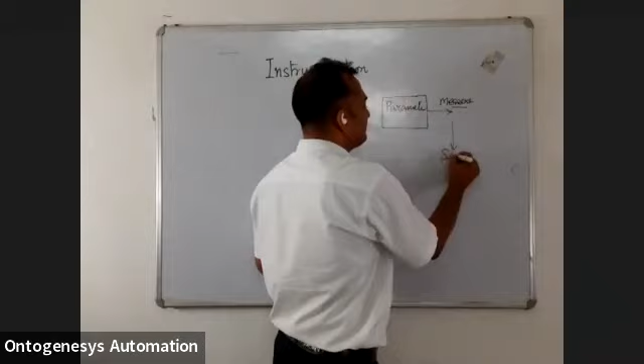To measure anything, what we need? We have to sense it. If we can sense any parameter, then we can measure that parameter. So we need some sensors. So if we can sense anything, we can measure it, and if we can measure it, we can control it.

Now, to control, we need what? We need a controller, some kind of controller. That controller might be electrical type, electronic type. Basically, we are going to study programmable logic controller and DCS system. PLC, or the complete system, distributed control system. We will study this.

Now, when I talk about PLC and DCS, the confusion that comes in our mind is what is PLC, what is DCS? Whether they are completely different things. But basically, this is a control and this is a control. Whenever we are talking about some small number of IOs, then it is our PLC. Suppose I am talking about some machine control, then it will be PLC.

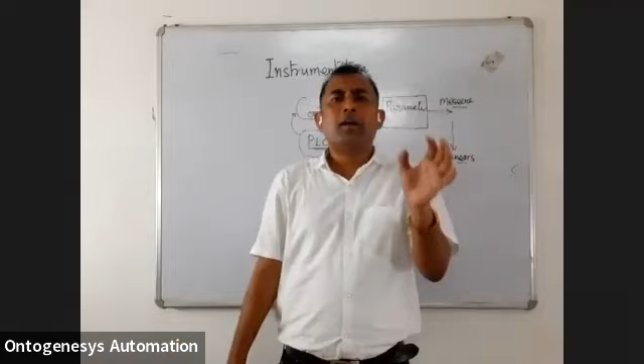Suppose you are having a packaging machine. Suppose I want to make some packets of turmeric powder or chips. So I need a simple machine for packing. Then PLC will be better. I will hardly need 8 to 10 inputs, and there will be some 4 or 5 outputs. So when I am talking about a few inputs and outputs, it is our PLC that can solve our requirement.

And when we need to handle a large number of IOs and interlink everything, like in power plants or refineries, there are so many divisions and all are interlinked to each other, then it is better to go for a DCS, distributed control system. We can also say that a distributed control system is a combination of multiple PLCs. You can have many PLCs, interlink them, take everything to a single station and give it to operators. So this is the basic difference.

Whenever I say PLC, it is small to large. A PLC can be as small as 2 inputs, 1 output, or something like this. But a DCS must have a certain number of inputs. Otherwise, it will not be of use. It will not be cost effective.

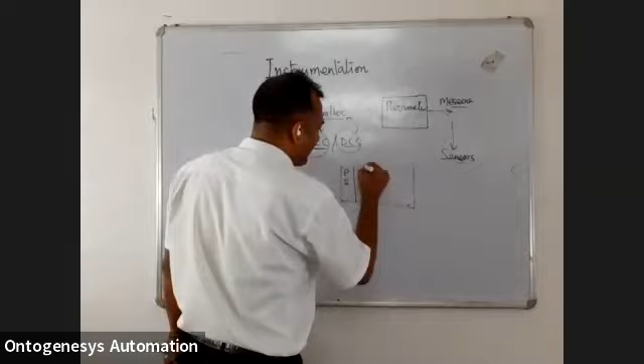Now to process everything, we need a controller, a brain, and that we call CPU, central processing unit. Just like our computer, we are having a CPU, but the design is different from the normal CPU. Unlike our normal computer, we are having some input/output cards or channels. This we do not see in our computer.

Yes, we are having some input and output in our computer also. What is the output in our computer? We can connect our printer. What are the inputs? We can connect keyboard, mouse, scanners, etc. But we can handle other physical devices also through this computer, but we need some external peripheral devices and programming. Those things are included in this.

This is an industrial computer, and we have an easy method to connect with the real-time environment, real-time devices. So we will be having digital input, digital output, analog input, analog output. So these four kinds of signals we will have in our field, and four types of cards will be attached to our PLC.

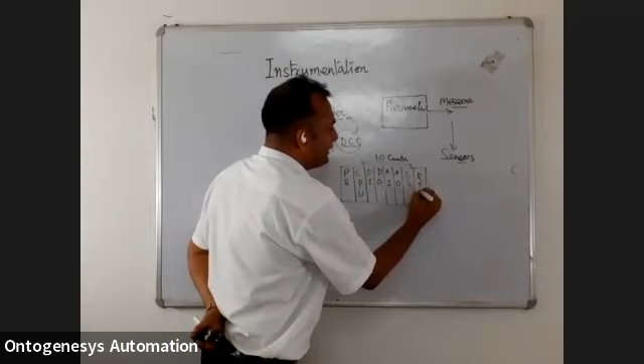Other than these four cards, we might have some cards for thermocouple and RTD. What is a thermocouple? A temperature measuring element. On which principle does a thermocouple work? If we have two dissimilar metals connected at one junction and there is a temperature difference or temperature gradient, then we are creating what? Voltage. Okay. So we will have some EMF or voltage here.

Can you tell me the range of this voltage? Will it be in volts or kilovolts or something? It will be millivolts. Suppose a thermocouple. So I am having this. Can you tell me what these are? These are temperature elements, temperature measuring devices, because they have a stem and some terminals. Can you please tell me which one is thermocouple, which one is RTD?

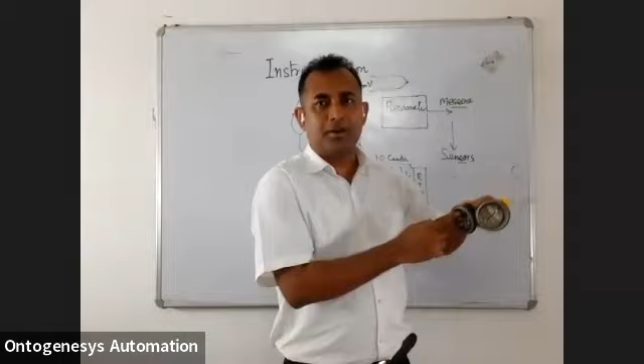So how to distinguish between the thermocouple and the RTD? We have to look at the terminals. And RTD has how many terminals? RTD has three terminals. Normally, we use three-wire RTDs. Okay, and thermocouple two-wire. So a thermocouple will be two-wire, and the RTD will be three-wire. This is the symbol of the RTD, and this is your thermocouple.

Now, what have you seen here? Terminals. In the black one there are six terminals, and in the yellow one there are four terminals. Then it is called a duplex thermocouple and duplex RTD. Means there are two RTDs and two thermocouples inside this case.

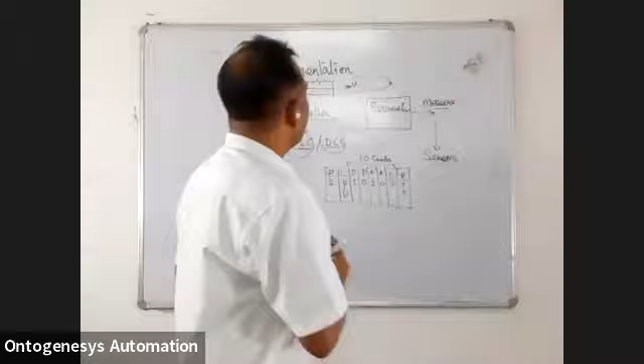Another way to identify the thermocouple and RTD is that in our thermocouple there will be plus and minus. Since we are getting millivolts, DC millivolts, there will be plus and minus signs. But in RTD, it is a single wire. Which material do we use in RTD? Platinum. Normally in our industry we use platinum 100, PT100, in our RTD.

And what type of thermocouple do we use? We use K type thermocouple. When I say K type thermocouple, the two materials selected are chromium nickel and aluminum nickel. What will be the range? The range will be up to 1200 degrees, 0 to 1200 degrees centigrade.

Normally this much temperature is sufficient for a furnace or in power plants or in big industry. This much range is okay. If you have some higher temperature, say 1500, 1800, then it will be different, right? But normally we use this.

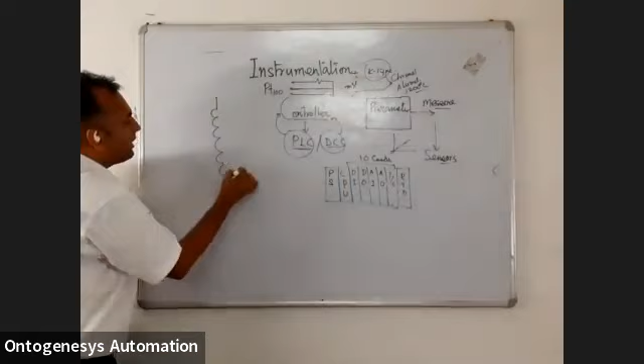What is the symbol? We show one resistance in the path of the RTD, and two common. This symbol means two lines are common. What is RTD? It is nothing but a wire. How is it working? What is the working principle? With temperature, the resistance of pure metal varies directly.

That means what type of material are we using here? We are using positive temperature coefficient metal. There are three types of temperature coefficient: PTC, positive temperature coefficient; NTC, negative temperature coefficient; and ZTC, zero temperature coefficient. So we are using PTC materials, means pure metal. Pure metals and some metal alloys are positive temperature coefficient materials. That means with increasing temperature, the resistance of the material increases.

If the resistance decreases, there will be negative temperature coefficient. Likewise, what are the NTC materials? Likewise, all non-metals, insulators, electrolytes, your semiconductor devices. Why are they negative temperature coefficient? In case of a semiconductor, if you put it at absolute zero temperature, it will behave like an insulator.

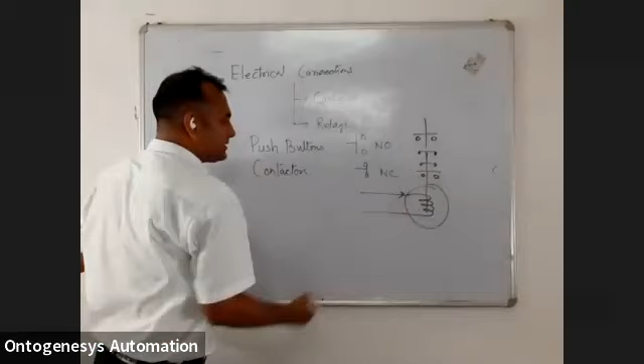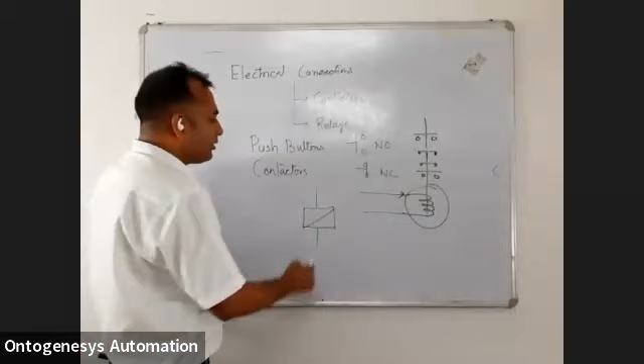So what is the circuit symbol? The circuit symbol for this coil is electric current - this is the coil of the contactor. And name it as A1, A2. The two terminals are named A1 and A2. So whenever there is a coil, whether it's a relay, a timer, or a contactor, we will name the terminals A1 and A2. Let's see here - A1, the other one.

This is like the A1 terminal. So we will be giving supply here. How much supply will we give? It will depend on the coil of the contactor.

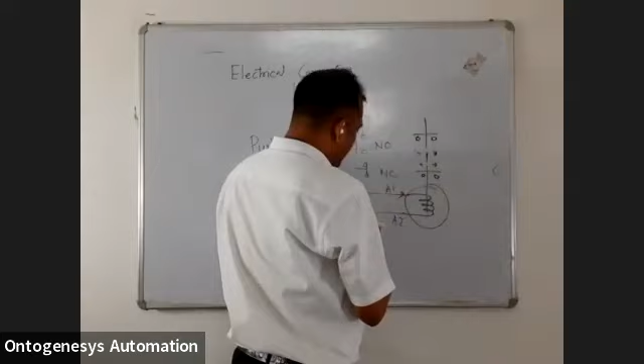L1, L2, L3. You might be thinking why L1 and these certain areas are marked like this. This is the standard nomenclature.

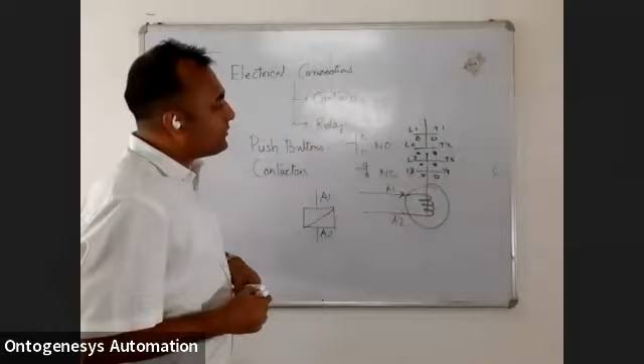The first digit represents the contact number, of the four contacts, and this is actually your starter circuit. So L1, L2, L3 are the three terminals, and this number shows the position of the contacts: 1, 2, 3. The second digit represents something else.

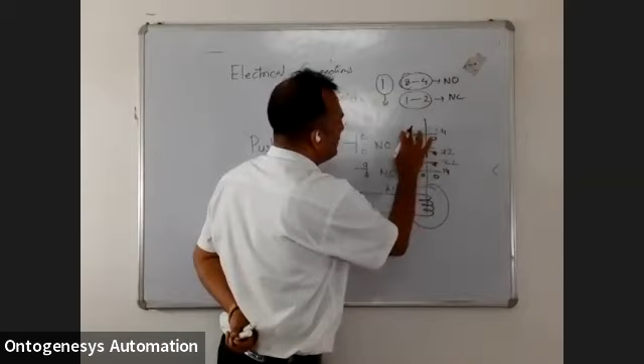LC 1, 2 - that is the number, the position of the number. Likewise this is 1, 2, 3. So I have 4 contacts, 1, 2, 3. The second digit represents whether this contact is NO or NC. So this is 3, 4. Likewise when you see the terminals you will find these kinds of numbers.

So the coil is represented by A1 and A2 terminals, and contacts are as 13, 14.

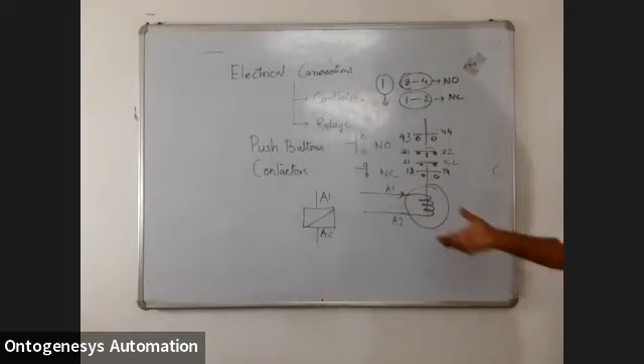Now to control electrical energy, control is separate. We will control this supply and this object.

So straight away I'm coming to our model. What kind of motor are we using in this? What kind of motor? Induction.

There are two types of induction motors. What are they? Either it is a slip ring induction motor, or a squirrel cage induction motor. So we will be using squirrel cage induction. This is how the induction motor works.

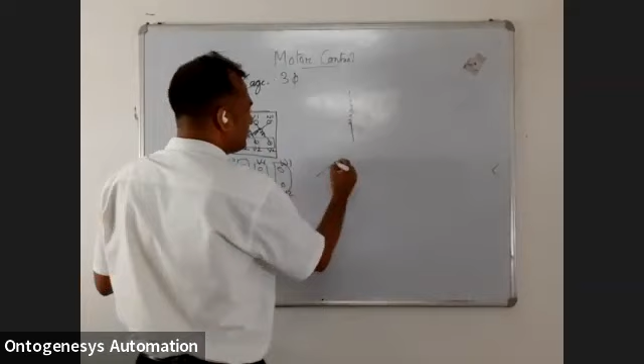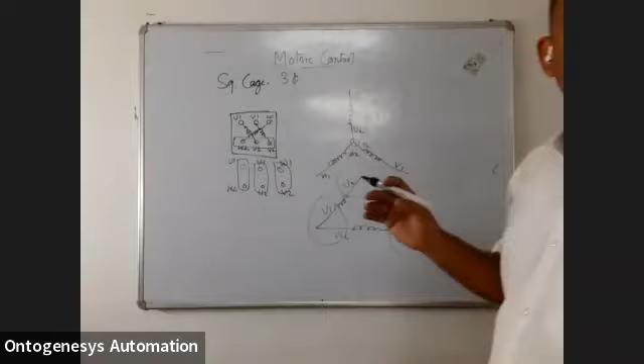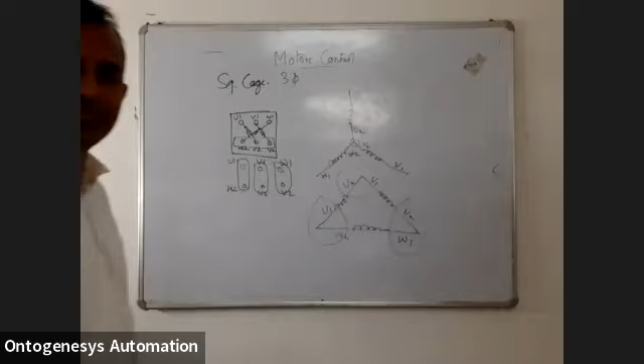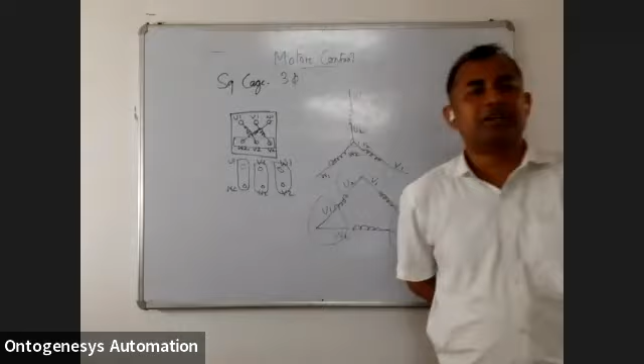When a balanced three-phase winding, displaced in space by 120 degrees, is supplied from a balanced three-phase current displaced in time by 120 degrees, then a rotating magnetic field is produced, which rotates in space at synchronous speed. And the direction of rotation is the same as the phase sequence of the supply.

When a balanced three-phase winding is displaced in space by 120 degrees, here are my balanced three-phase windings displaced in space by 120 degrees, supplied from a balanced three-phase current displaced in time by 120 degrees. So current is displaced in time by 120 degrees, and the coil is displaced in space by 120 degrees. When they meet, the rotating magnetic field is produced, and its speed is the same as the synchronous speed, and the direction of rotation is the same as the phase sequence of the supply. That means if I interchange the phase sequence, the rotation of the induction motor will be opposite.

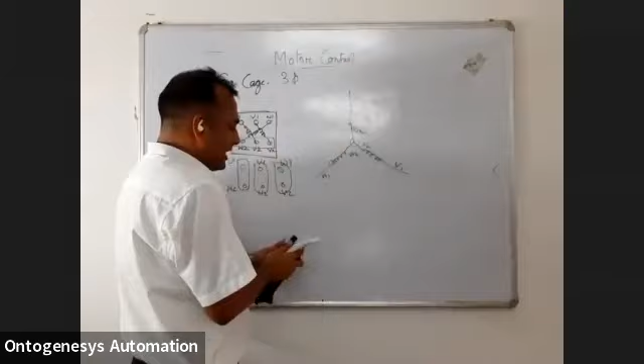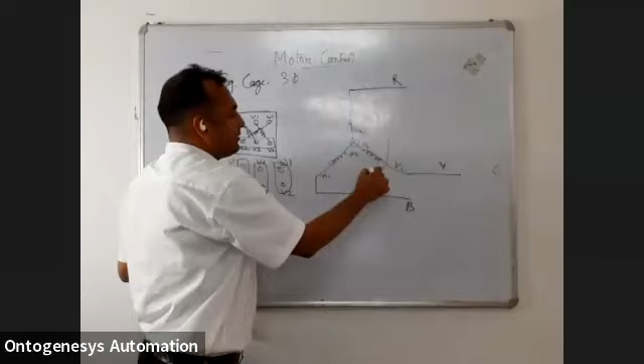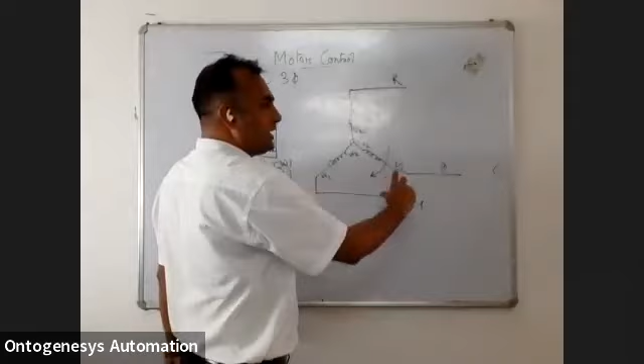Suppose I am connecting this motor. As the machine is rotating, I can change the rotation of the machine by interchanging any two phases. I just interchange two phases, and the rotation of the motor will reverse. So we can just interchange the two phases, and the rotation will change here.

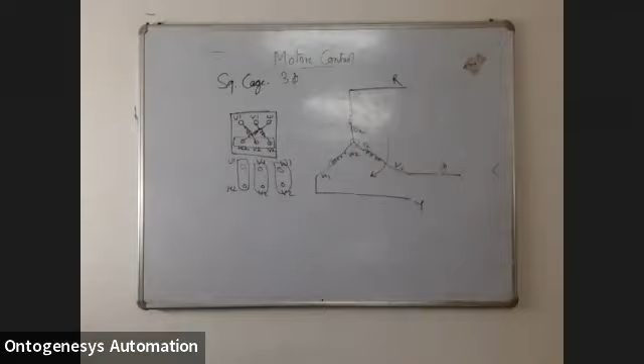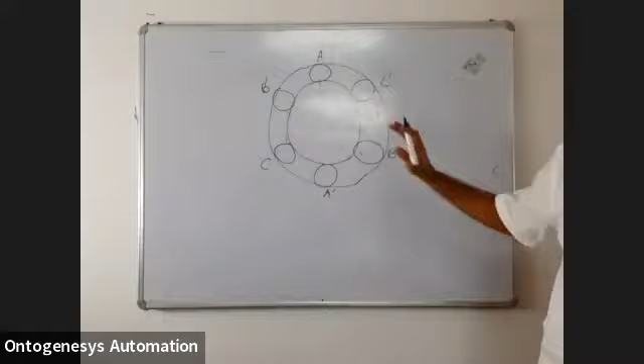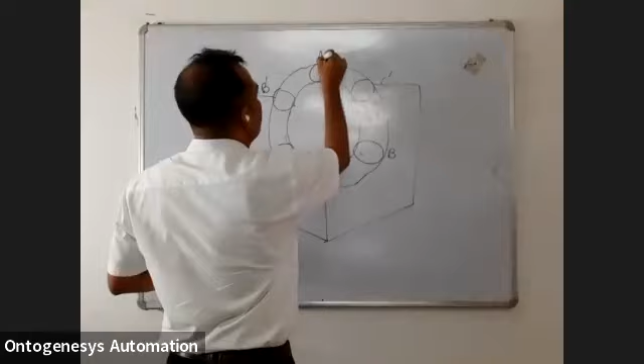Now what I will do is short this B dash - three terminals I will short, so it is a star connection. Now I am feeding it with three-phase balanced supply - this is one phase, this is second phase, third phase.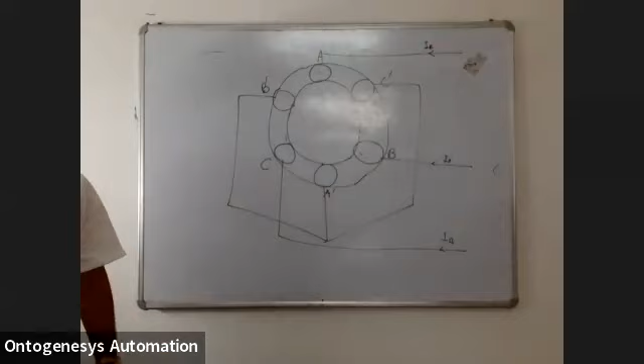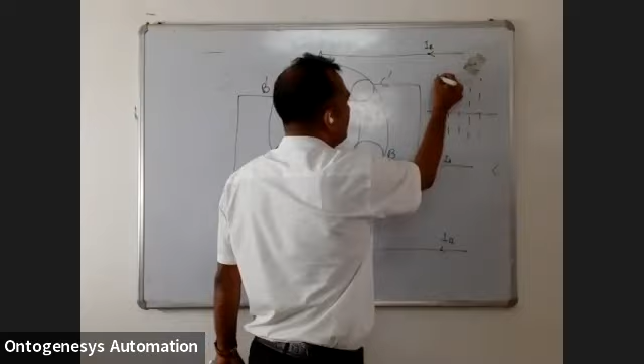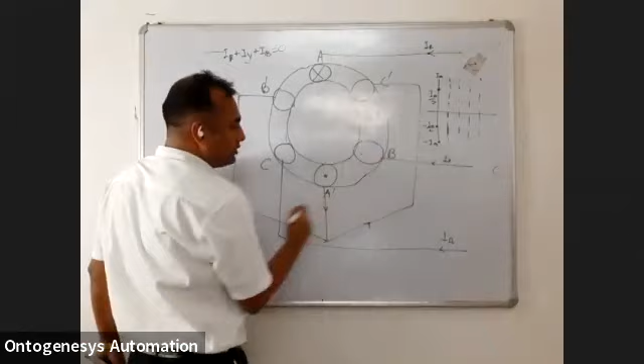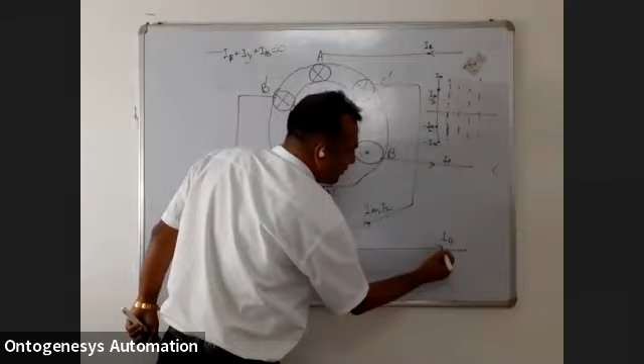Now, if you understand the three-phase supply, suppose this R phase is having the maximum current. At that time, the other two will be having minus IM by 2, because IR plus IY plus IB balance to zero. So when my IR is maximum, IM is coming in, out, and then going into the windings. The two windings have a balanced circuit, so having the same impedance, this will be IM by 2, moving from the terminal in this direction. So when my IR is maximum, IY is lagging at minus IM by 2, and IB is also minus IM by 2.

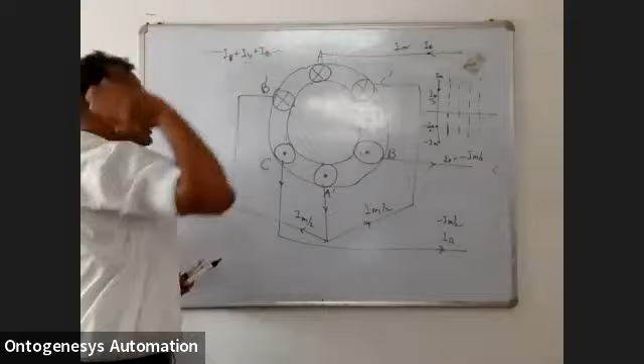Now what have we done? We have created a three-phase winding, placed 120 degrees apart in space, and we have supplied this three-phase winding with a balanced three-phase supply. The current is displaced in time by 120 degrees. First IR will be maximum, after that IY will be maximum, after some time IB will be maximum. So this three-phase supply is balanced.

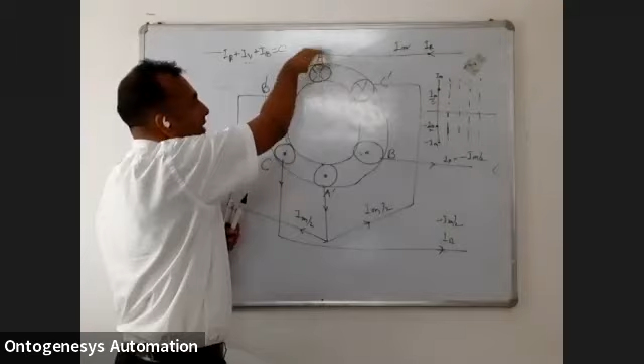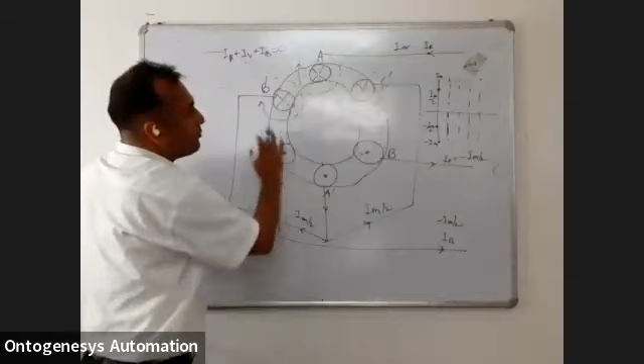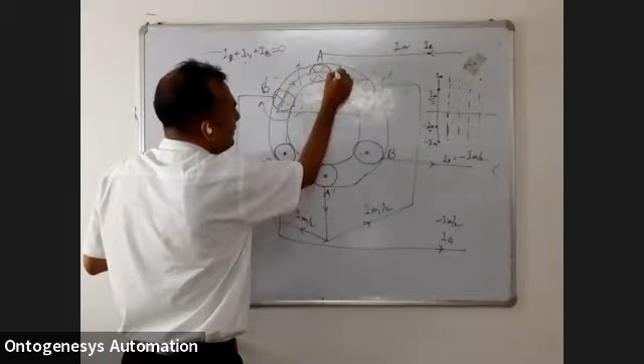Okay, now we can see - if this current is going in, what will be the magnetic field? The direction of the magnetic field will be clockwise. Since it is an iron body, all the magnetic field will choose the path through this stator and come out, cutting the rotor. Similarly, you can see here the flux is in this direction, the flux is in this direction.

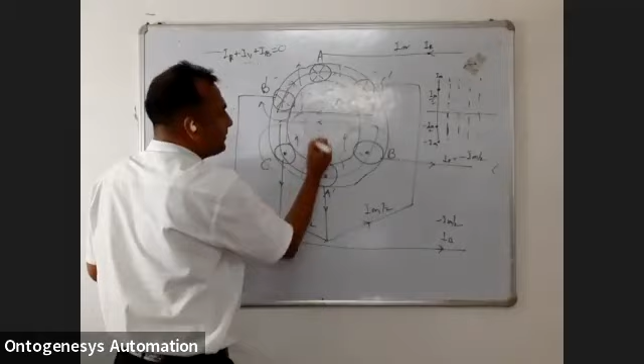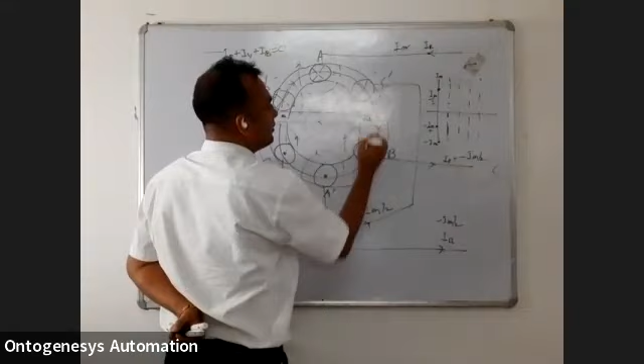So ultimately, okay. Now you can see in the stator, the flux is entering at this point and leaving from this point. Isn't it? So the part of the iron from where the magnetic lines of force or magnetic flux are coming out is called the North Pole. So here the flux is coming to here. So this is North Pole and this will be South Pole.

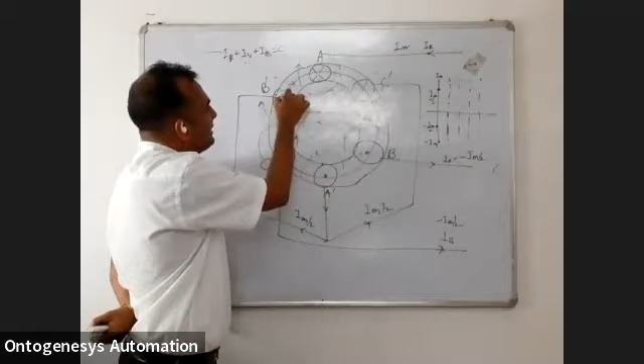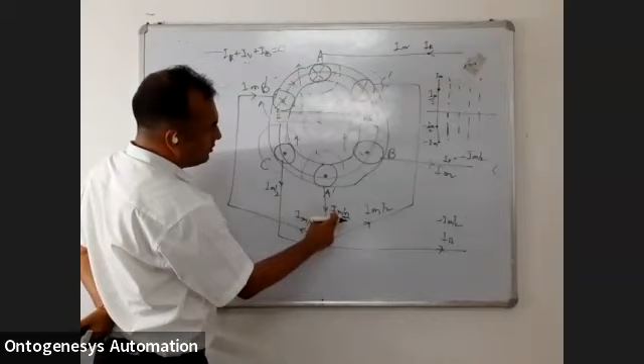After some time, this should be maximum when the current is in, maximum current is in. Suppose it is rotating, so current is in and maximum current is here. This is giving IM. So if this is IM, this will be IM by 2, and this will also be IM by 2. If this is coming, this is also coming to them. IM by 2 plus IM by 2.

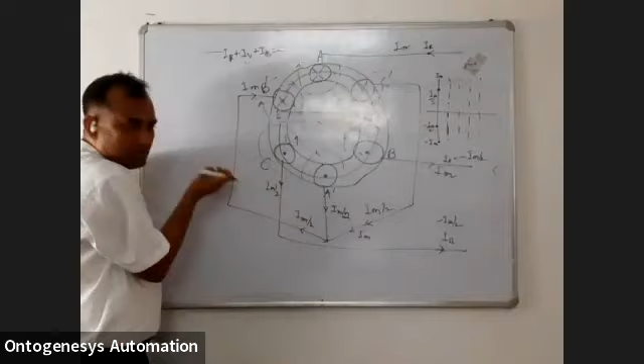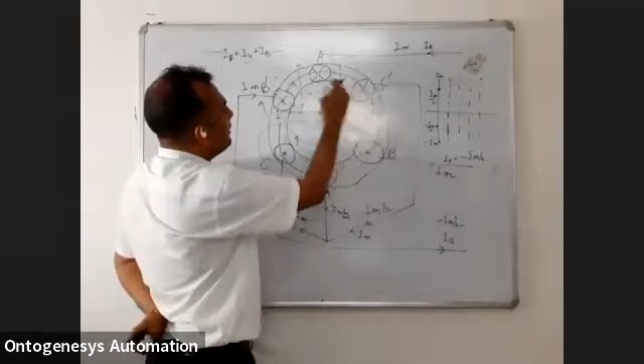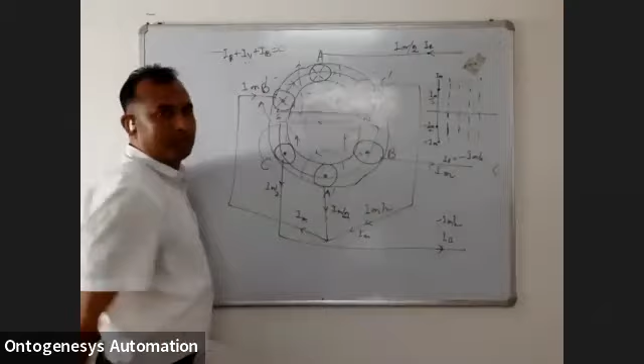Now you see, the current is leaving from A. Current is leaving from B, from B dash, from C dash. Are you getting the point? This is IM by 2, this is IM by 2, and this will be IM. So if it is IM by 2, the current here will be IM by 2, and it is coming out. The direction will be opposite. So IM by 2 current is coming here. Got it?

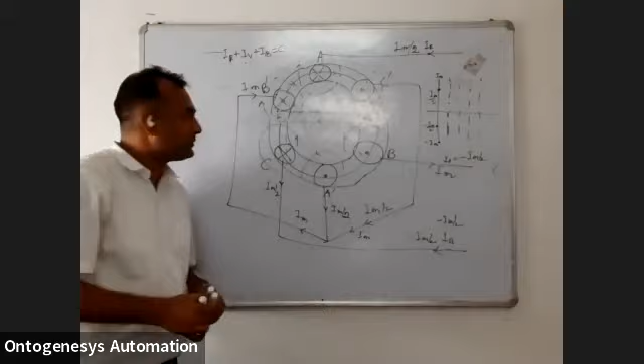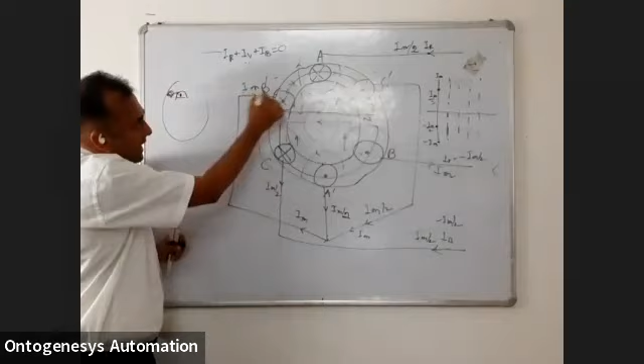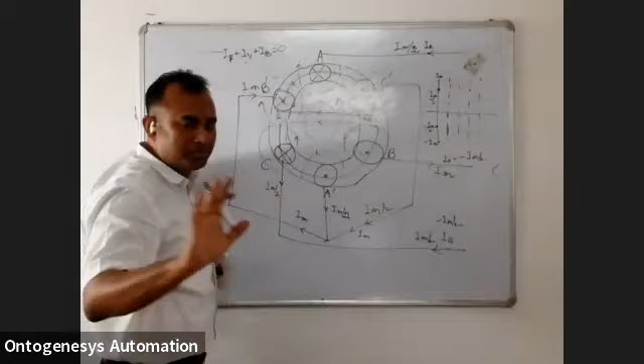First part we have considered. Now, after say 60-degree rotation, taking some 3.33 milliseconds, the magnetic field is shifted. So maximum current is here, that means IM. From B it is coming out. Now if B phase has this current, A phase has IM by 2 leaving from A dash. Incoming is cross, outgoing is dot. So IM by 2 is coming in and IM by 2 is leaving.

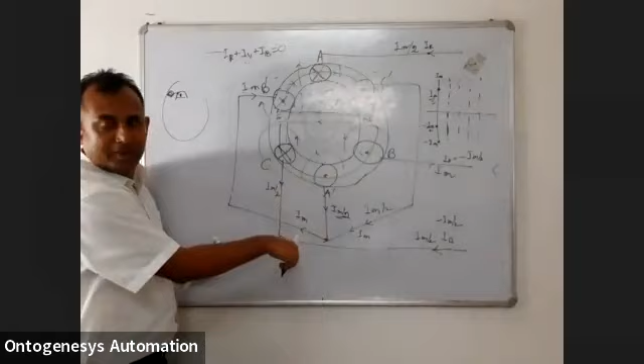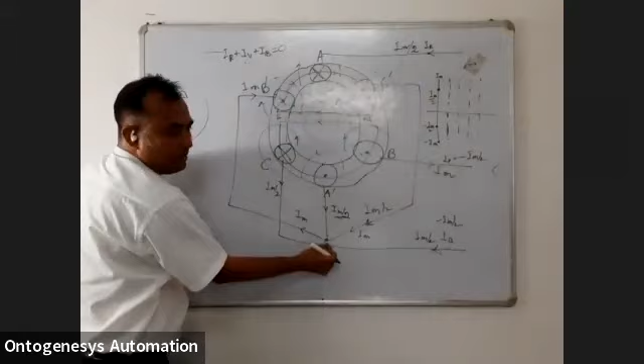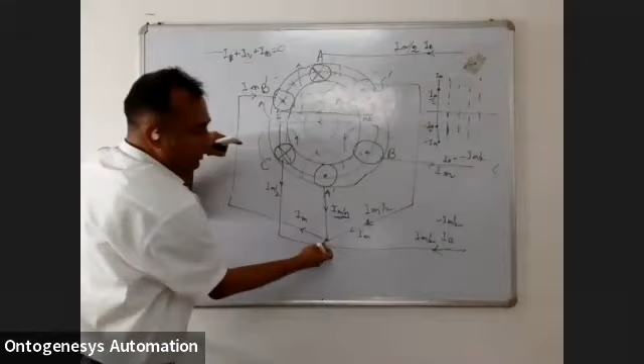Since this is IM, IM by 2 is coming out from C dash and coming in from C. They are meeting at this point, IM by 2 plus IM by 2. From C, the IM by 2 current is entering, from C dash it is leaving and coming to the common point, the star point. Okay, now it is clear.

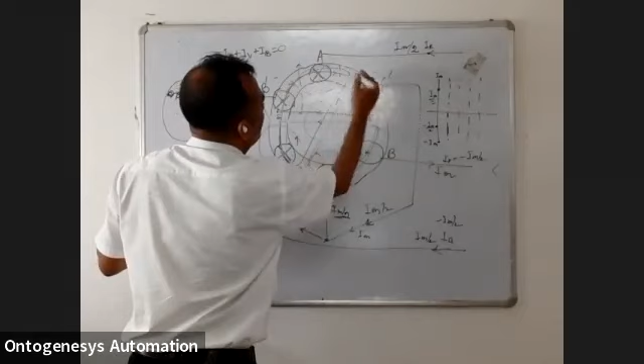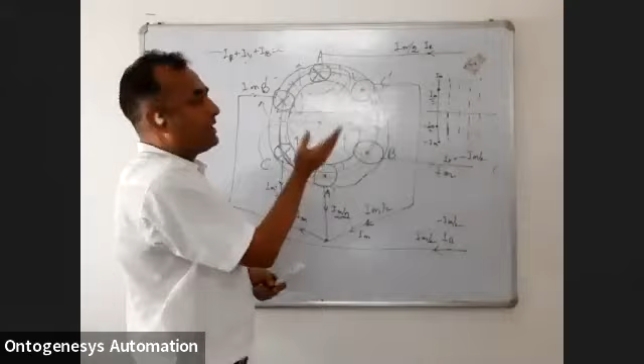Now you can see my cross has changed its position. Previously it was these three, now it is these three. So the magnetic field will be from here. So this part is the north pole now. Your south pole was here, now it is here. Your north pole was here, now it is here. That means the magnetic field is rotating. After 3.33 milliseconds, this north pole will be coming here. That's how we get a rotating magnetic field.

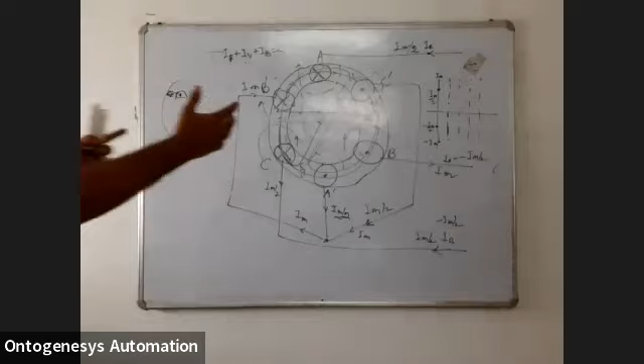And since the field is rotating, we'll be putting a squirrel cage rotor. A squirrel cage rotor means a rotor which is closed from both sides. Whenever a rotating field cuts the closed circuit, an EMF will be induced in the rotor, and that induced EMF will produce another magnetic field, the rotor magnetic field. This is my stator magnetic field which is rotating, and the rotor will have some EMF induced due to the rotation.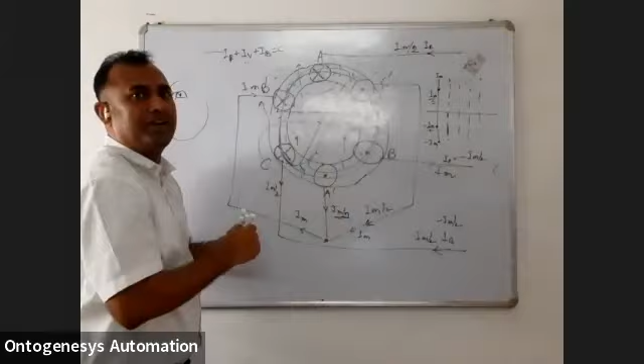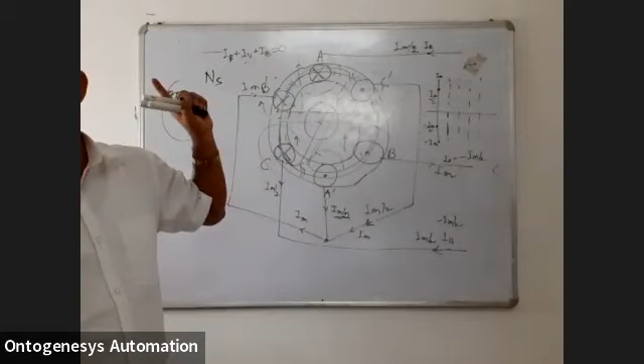Suppose this rotating magnetic field is rotating at a speed of Ns, synchronous speed. Now the rotor is static, so its speed is 0. So what will be the speed difference? Ns minus 0 is Ns. So delta N is equal to Ns minus 0.

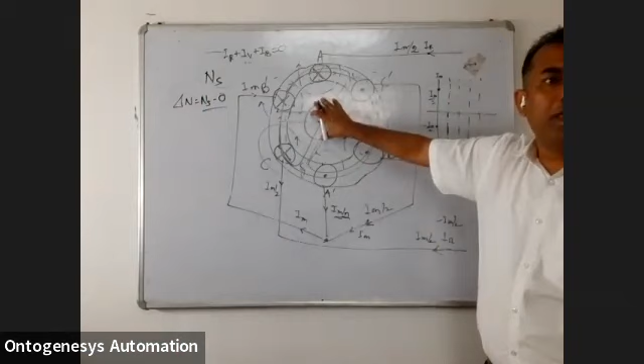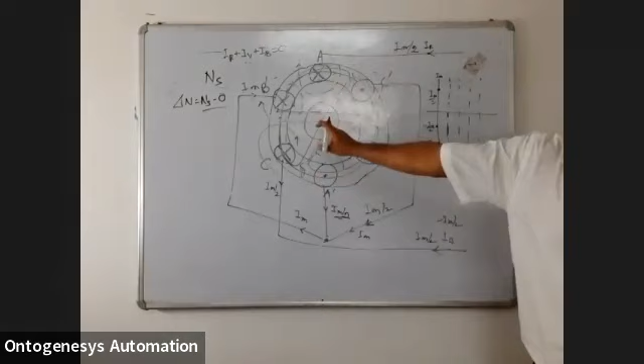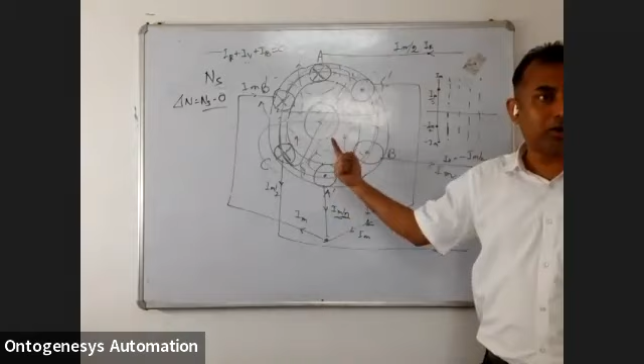That means there will be some induced EMF, and this induced EMF will allow a current to flow inside the rotor so that the current produces another magnetic field to oppose the rotating magnetic field, due to Lenz's law or inertia. Now the magnetic field is rotating and coupling with the rotor. Due to this, the dipoles inside the rotor change orientation and an induced EMF is produced, driving a current that produces another magnetic field inside the rotor.

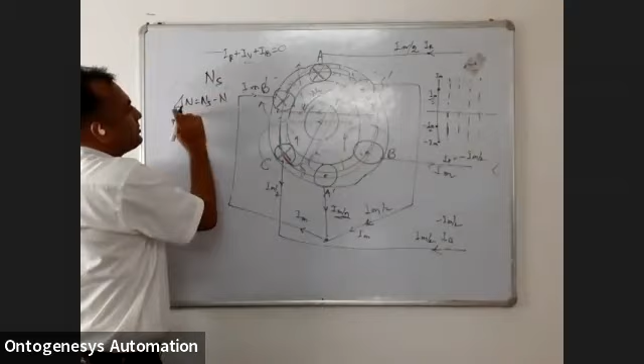So the rotor will start moving in the same direction to catch this rotating magnetic field. And suppose the rotor starts moving at the speed of Nr, so the difference of speed will be Ns minus Nr. So the rotor will start moving higher and higher to catch Ns, but it will never touch. And this part is called your slip. Right? This part is okay.

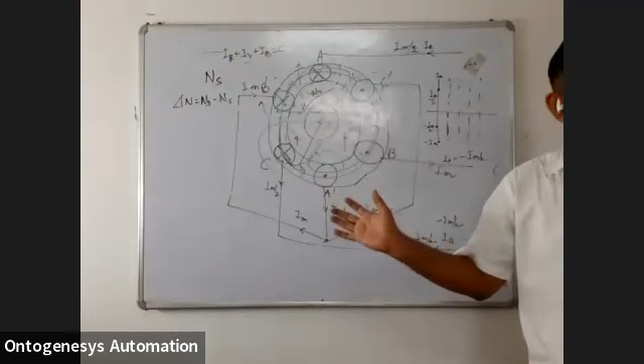These are all some of the theoretical lessons that we are working on. I have just explained it for the reason I have given you just now. Whenever it is displaced by 120 and applied by a three-phase balanced current, which is displaced in time by 120, then it is rotating; how it is rotating we have understood. You don't need to go further; it is best that you have understood how the induction motor is working.

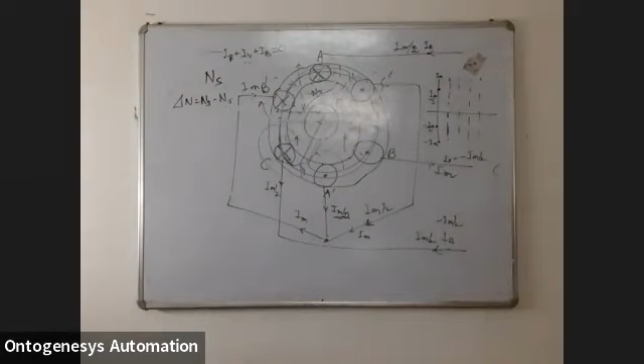Okay. Now, we need to connect the terminals. We have to feed the induction motor from a three-phase system. And how can we connect it? We can connect it in star or in delta. Okay. So you make a starter for this induction motor. The starter may be direct online starter, star delta starter, soft starter or VFD, variable frequency drive. Those are the types of starter that we use to start our induction motor.

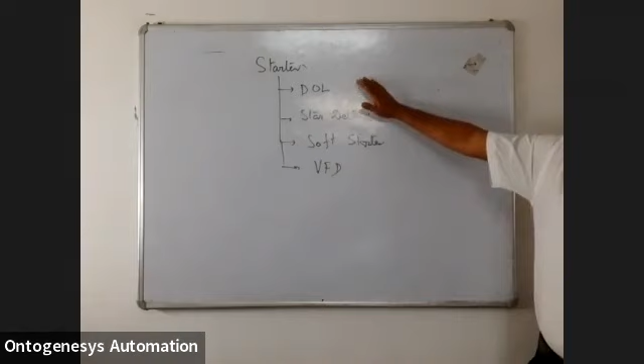When we use the DOL starter, DOL means direct online starter. When we use a direct online starter, if your motor is small rating, usually we connect the motor in star. That means we short U2, W2 and V2 to make a star connection. And simply feed from a three-phase supply, and the motor will start in star.

Normally we avoid delta connection in a DOL circuit. Why? Why do we not use delta connection direct online? What is the reason that we do not connect the induction motor in delta?

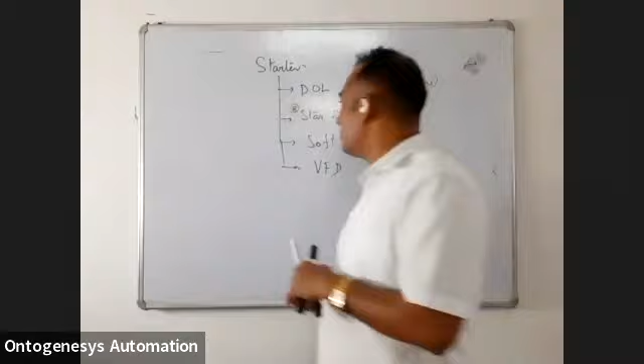3000 RPM. The motor is running, but I do not need this much RPM. I want some lower RPM, say 1500. So I have to give some command. So how can I give a command to the PLC? What are the configurations that I need to do in my software or PLC?

Now, based on the pressure and temperature, I have to control the feeding. So how can I control the feeding? I can control the RPM of the feeder. So when the feeder is rotating at a lower RPM, it will be getting lesser force. We will be using some pocket feeder.